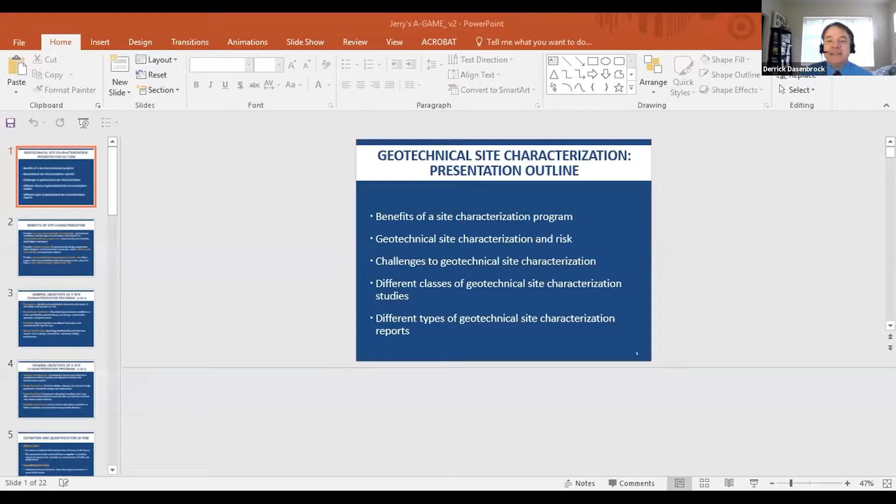Okay, good afternoon, everybody. Thank you, Derrick, for that great introduction that we always write for ourselves and then somebody else presents. So my presentation, I believe Eric's as well, will be about 25 minutes. I have about 20 slides in this particular deck. In slide number 1, the slide numbers are located in the lower right-hand corner of each slide. I'll be addressing the topics for the 5 bullets that you see here. Some I'll spend a little bit more time on than others as we go through these slides.

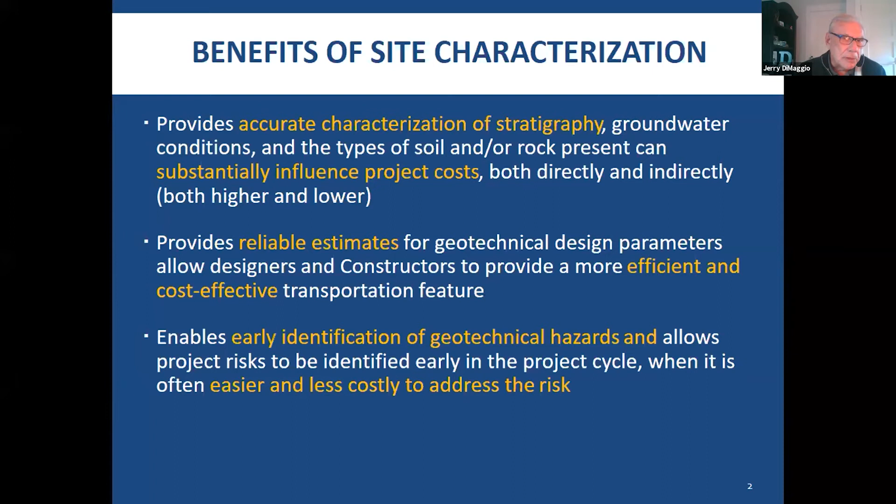And Derrick gave a great introduction in terms of what the objectives and goals are for this particular webinar. So let's begin with the benefits of site characterization, and I'll use my cursor as a pointer as appropriate. Some of these are quite obvious, like the initial one, accurate characterization of the stratigraphy. We do that because it has a tremendous impact on project costs, both directly and indirectly. We're interested in the second bullet, reliable estimates for geotechnical design parameters. And the third bullet speaks to an area that's grown in attention, I'd say in the last 15 years: the focus on geotechnical hazards. A regional type hazard, of course, would be seismic, but we could have local hazards as well as other regional hazards.

Well, let's speak a little bit about the general objectives of a site characterization. This is one of two slides, with some redundancy from the previous slide, but the objectives are very important for any study you undertake, because if you don't have a defined objective, you won't know success when you achieve success. So as we said before, we're interested in stratigraphy, groundwater conditions, and honestly, we don't do as good a job as we could and should relative to the underground groundwater environment many times. We're interested in suitability, and suitability is for the specific objectives and uses of the geotechnical feature that we're interested in evaluating. I already mentioned hazards, how we're going to cope with hazards, what are the design protocols and the construction means and methods associated with that.

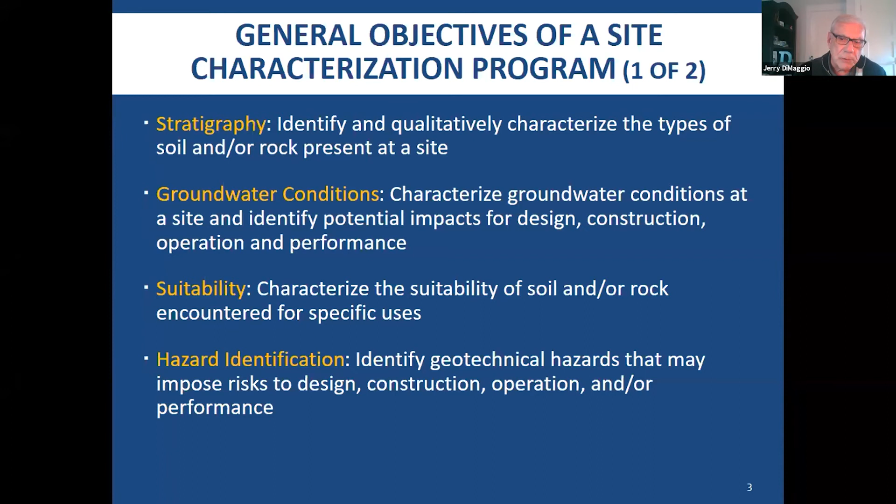Continuing on with that theme of objectives, we're interested in location and alignment and the qualitative characterization of the conditions so that we're better informed in terms of location and alignment decisions for all types of infrastructure projects. We're focused on the highway community because that's kind of where we all live, at least in part. But everything in this webinar series is equally applicable to all types of infrastructure, could be rail, energy projects, wind farms, et cetera.

We're interested in design parameters, and Eric will cover this in a lot of detail, the reliable estimates of the relevant design parameters we're going to be needing for both design and construction. Still today in my practice we often forget about the concept of constructability tied to the design parameter bullet. When we select design parameters, we should be fully cognizant that we're selecting those for two phases of the project, design and construction.

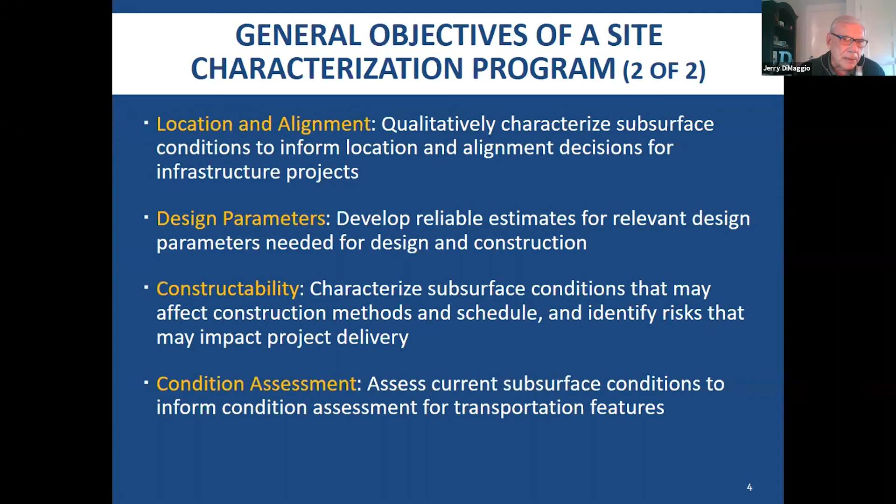We're also interested in the last bullet, looking at the condition assessment of geotechnical features, specifically transportation features. That might be immediately in post-construction. Many of you are aware of the transportation asset management programs underway for more than a decade in the last two highway bills, and there's continued growing interest in geotechnical assets. The new AASHTO code for design and construction of highway tunnels has a design life of 150 years. That sounds wonderful, but what does that mean? How do I develop the protocol for evaluation post-construction between the closure of the project and 150 years? Fortunately, I'm not going to be around, and probably most of you won't either.

Let's talk a little bit about risk. That's a buzzword we hear often. I'll begin with this slide and a subsequent slide providing a little definition. It's a futuristic event, and that's often forgotten, so it may occur, it may not occur. We often think of risk as a negative connotation, but if we look at risk and apply it at a project, program, enterprise, or organizational level, we can also have risks that are positive, and we call those opportunities.

So a little tutorial on the basics of risk management, looking at it at a project level related to cost, schedule, or the maintenance of traffic, the MOT required for a particular initiative. Even on a relatively small project you can encounter lots of risk. I worked with Puerto Rico Highway and Transportation Authority about five years ago on a $2.5 million bridge replacement, and the evaluation of risk assessments, several related to geotechnical, amounted to over 70 risks on that $2.5 million bridge replacement project.

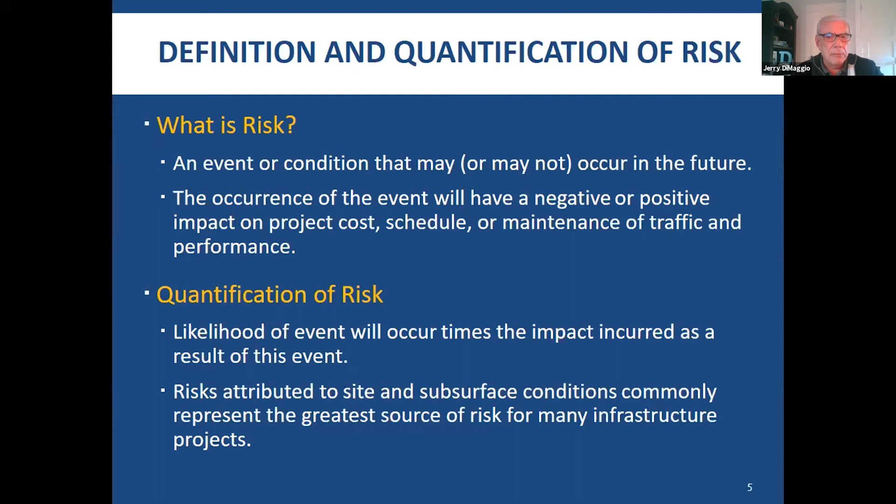Well, you can't address all those things, so there's got to be some protocol for evaluating which risk is more important, both the opportunities and the threats. We do that by a simple product: the likelihood that the risk or event might occur times the impact or consequences if the risk should occur. Unfortunately for us, and maybe fortunately for us, many of the risks attributed on infrastructure projects are directly tied to site and subsurface conditions, and they often result in disputes, claims, arbitration, bench trials, trial by jury - all painful processes for those of you who haven't gone through this.

So a little bit more on risk is, how do we manage these risks? I use the Puerto Rico example of the 70-some-odd risks on a $2.5 million project. Well, the term that's really applied, and continues to struggle to be mainstreamed, I would say, by most of the 52 departments of transportation, is risk management.

Many people have the opinion that when you develop a risk register, you can pound your chest and yell yahoo, and that's terrific, and you're all done. That's really just the start of the program. That takes you through identification and assessment. To really be undertaking a risk management program, you have to develop an action plan, and that action plan may require some resources because it's intended to be a proactive plan.

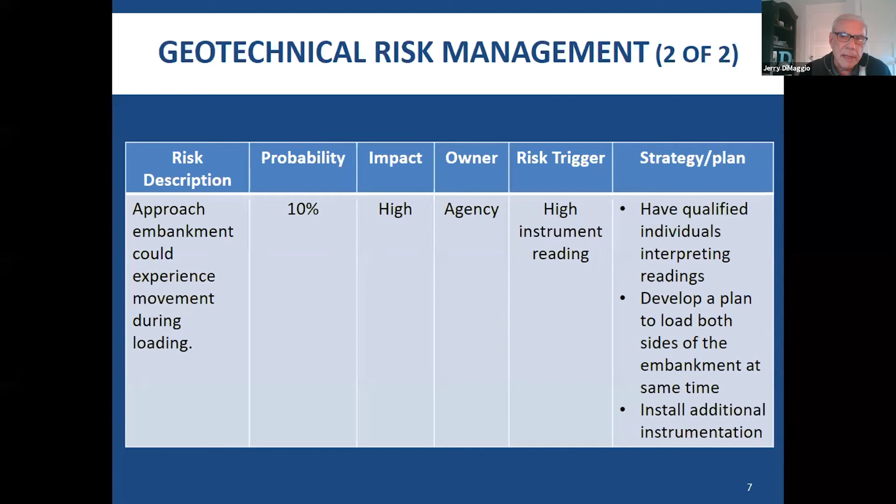That's the risk trigger. And then, as I mentioned before, we've got to have a plan. You can see, without going into it, we've got three possible strategies that we can evaluate based on the probability of success and the impact of taking on those actions - how successful we would be in mitigating the risk or seizing upon the opportunity.

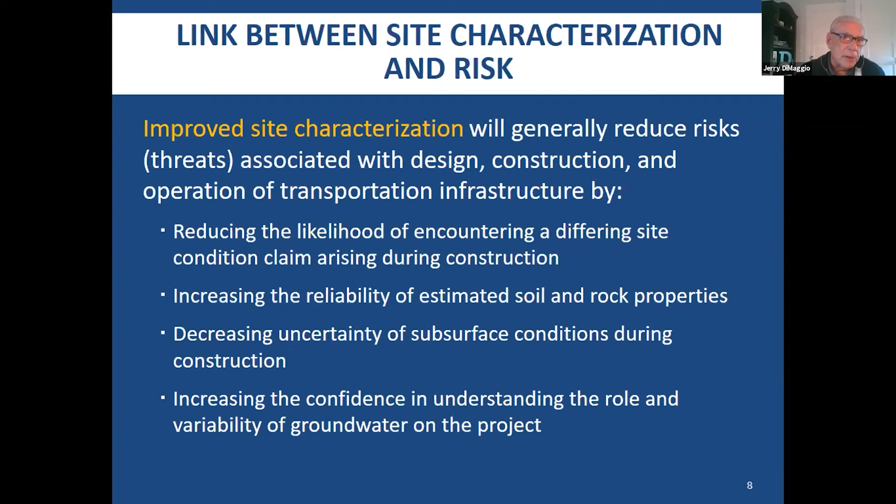Now, P3 projects require some extra thinking on behalf of us involved with site characterization, because the information we gather and its utilization not only affects design and construction, but is related to maintenance and preservation activities that have to occur at least during the period of the franchise. So there's a bit of a value proposition with site characterization.

And if you answer yes to both of those questions, the site characterization scope you've laid out produces value and is justified. Now, what happens next is dependent upon your ability as a good salesperson. Most engineers and scientists are terrible communicators. So if you've got to sell that to a structural engineer, a maintenance engineer, a construction engineer, put on your best tie, make sure you take the mustard stain off, and practice what you're going to sell to people so you can make the value-added proposition that's appropriate.

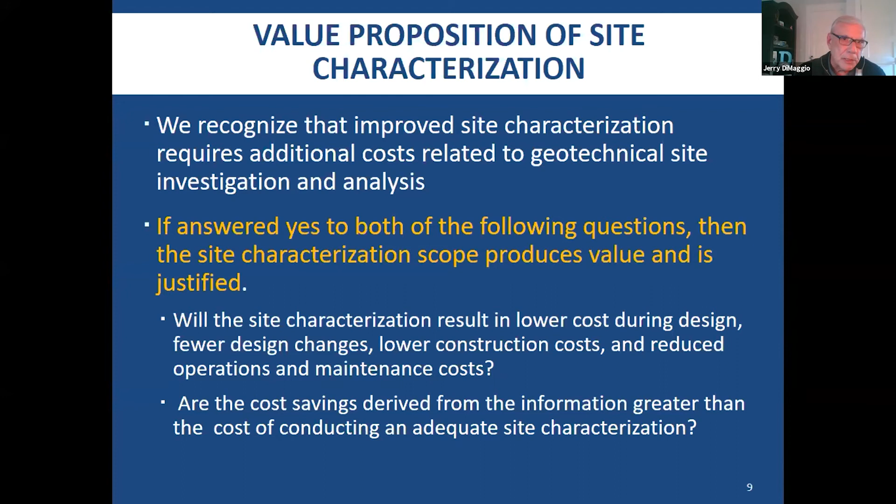As you all know, there always is a gap for a multitude of reasons between state of art and state of practice. Specifically in this case, I'm sharing with you a couple of insights related to site characterization and how wide is that chasm.

Great advances in instrumentation and techniques for geotechnical monitoring and site characterization exist, but they've been slowly adopted into mainstream practice. So if you see one of these tools as we go through this second year of the winter webinar program, we're interested in adopting these things as appropriate into mainstream practice.

As an example, several innovative, great publications on the advances that have been made with the cone. Specifically, citing the reports done more recently related to evaluation of liquefaction potential.

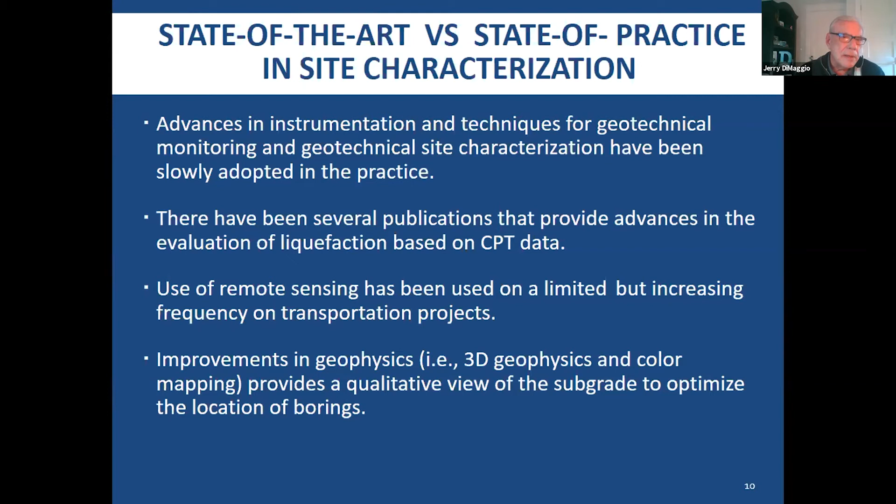Remote sensing, which we're going to hear quite a lot about in this series as Derrick and Ben Rivers will speak to, has been used on a limited basis but with increasing frequency on transportation projects. And improvements in geophysics, which have been with us since I was in undergraduate school 50 years ago, have brought fantastic advances not only in sensor technology but also summarization and interpretation of historical geophysical methods. We've also developed techniques that didn't exist 10, 20, certainly 50 years ago.

Another topic growing in interest is the concept of geotechnical data management. We expend hundreds of thousands, if not millions, of dollars on collection of subsurface information, squashing of samples, interpretation of soil, rock, and geomaterial samples, and then historically we do that on a project basis.

Some of you are familiar with a more specific term called DIGGS. DIGGS is one of the tools that's been under development for a couple of decades now and has come into its own, and you'll be hearing more about that in other presentations.

Let's talk a little bit about trends that help us related to site characterization. Everybody knows what the letters LRFD now stand for. The geotechnical community went there kicking and screaming - first LRFD AASHTO specification written in 1994 - but geotechnical people today have drank the Kool-Aid. One beautiful thing about reliability-based design, specifically LRFD, is that the resistance factor can be directly tied to the quality of subsurface investigation and site characterization.

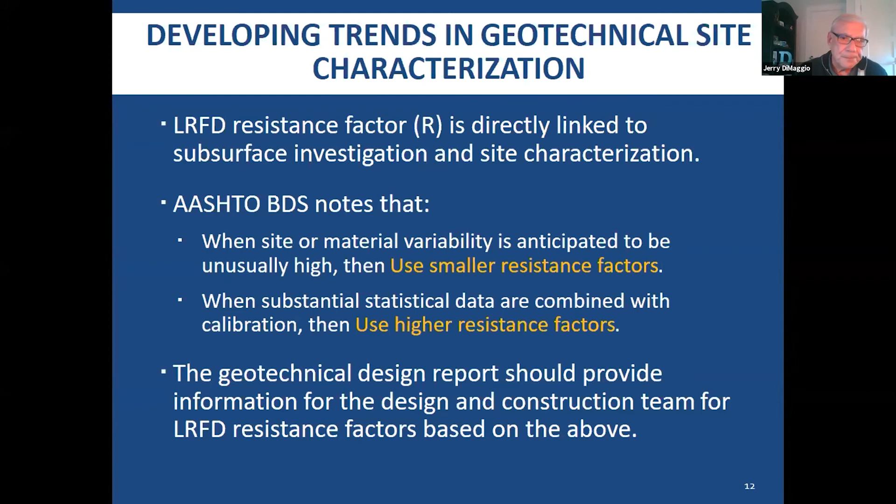What I'd like to share with you is not all of these, but to hit harder on what I mentioned before - the office study. I was corrected by a good friend of mine, initials BR - I wonder who Ben Rivers is - because I had this titled about a year ago as desk studies, which is the traditional term. Ben advised me that a lot of offices don't have desks any longer, so it was more appropriate to use the term office studies. So I too have drank the Kool-Aid. But back to the task here.

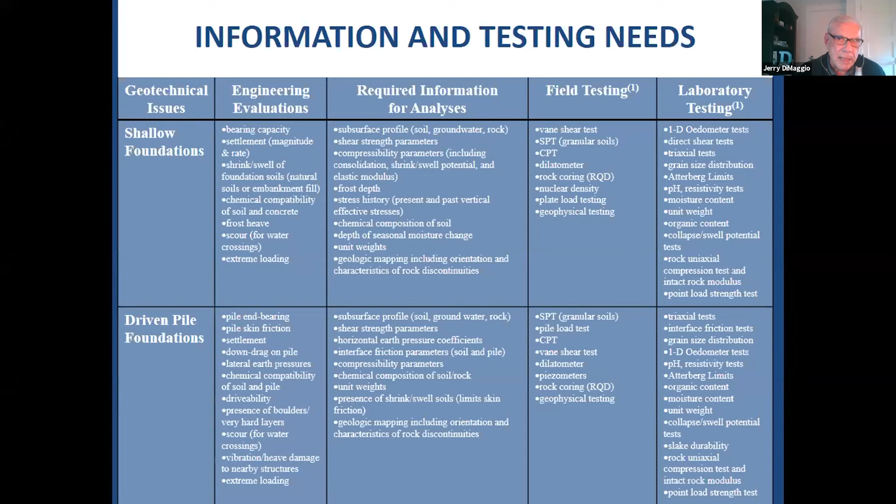So sticking with the driven pile example, you could see those listed - what type of field testing might be required in order to provide the information you need to execute your analysis. And you see those listed, no surprises there as well. Finally, at the extreme right column, you see what types of laboratory tests might be appropriate. Of course, the field testing and laboratory testing are complementary to each other.

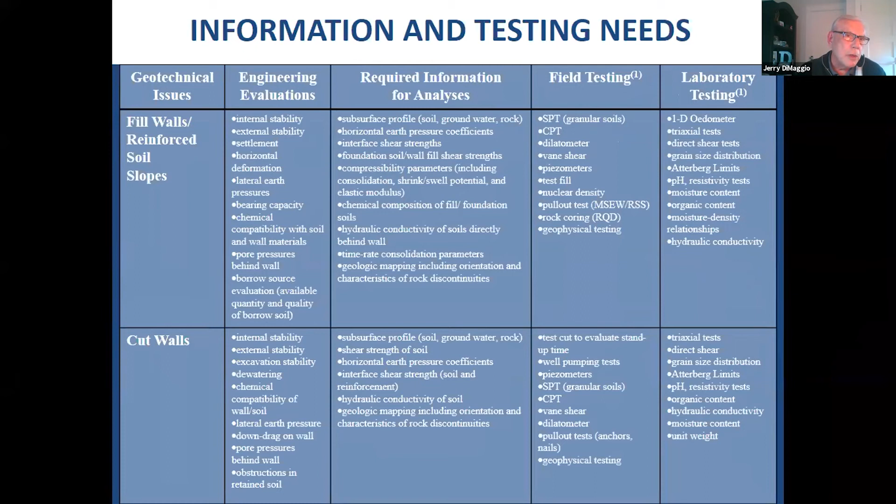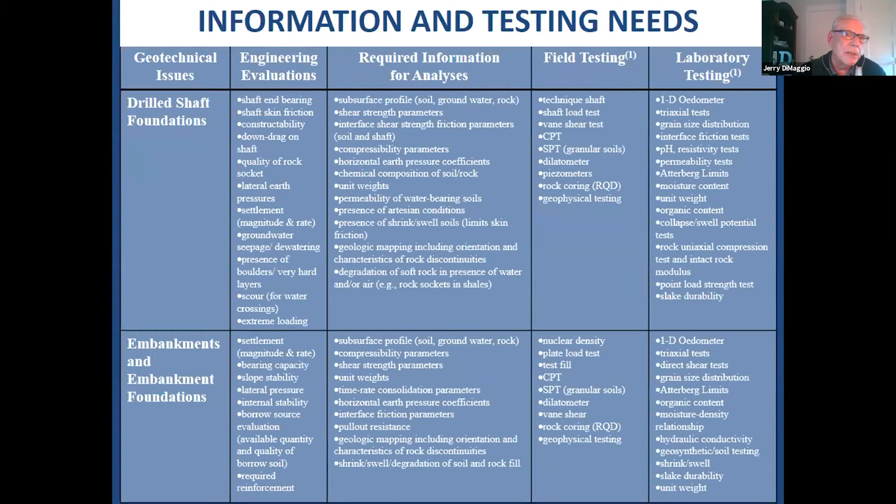Now, two other slides of this type exist. I'm not going to go through these as I did using the driven pile example, but you see the types of geotechnical features addressed: fill walls, reinforced soil slopes, cut walls. And a final slide of this type: drilled shaft foundations, or drilled foundations generically, and embankments and embankment foundations.

Now, one thing I haven't mentioned that I think is quite important - and I'm biased because I was one of the co-authors of GEC 14, which is about quality, or assuring quality, in geotechnical reporting documents. We have a number of reports, as the geotechnical specialists on the webinar today know about: field investigation logs, geotechnical data reports, geotechnical design reports, and geotechnical baseline reports.

So this document, if you're not familiar with it, I would strongly encourage you to obtain it and review it. It's focused solely on the design type reports, not geotechnical reports or the documentation recorded during the construction phase of the project. So you're zealous, you've collected all this information, evaluated it all, you've written one or more of these type reports. What do you do with it?

Final slide of my presentation. A topic that comes up quite often is how do we deal with investigations for projects using alternative contracting methods?

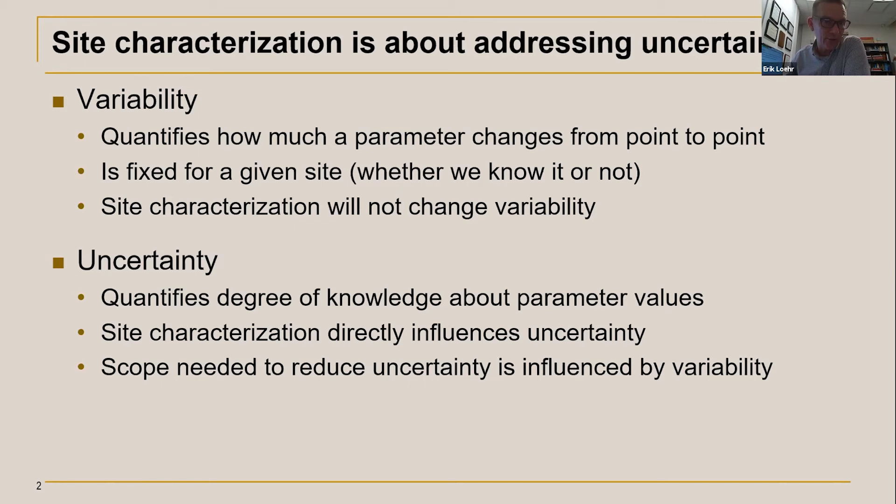These two terms are not completely unrelated. How we reduce uncertainty certainly depends on the variability of a given site. The last bullet we could probably debate, but it's my philosophy that in most cases, variability is best addressed through judicious design. So if we have a really variable site, really variable stratigraphy, we ought to be thinking about designing things that can accommodate that variable stratigraphy. Maybe that includes foundation systems that can be lengthened or shortened, or specific construction phase evaluations or other kinds of things.

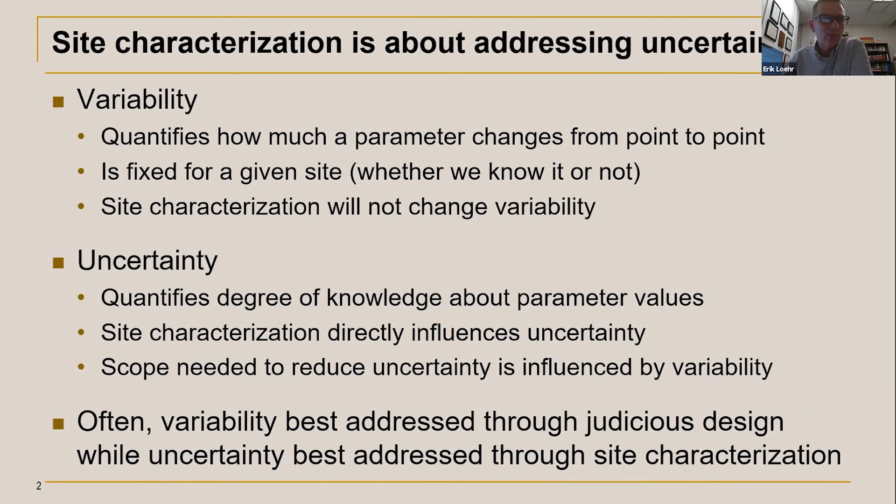Variability is what it is, and so it's oftentimes best addressed through design and construction. Uncertainty is what we're after through site characterization, and when we do more investigation, we can generally reduce that uncertainty, and we'll try to put a quantity on that as we go through.

So I'll start here with current site characterization requirements, and like Jerry, I'm focused on the transportation community here, but it really goes beyond that, and the same kinds of things apply to other jurisdictions as well. Most of our site characterization practices—Jerry's summarized some of the AASHTO things—have prescribed minimum requirements: a certain number of borings, certain spacing of borings, a boring every 200 feet, a boring every 500 feet, sampling every 5 feet, and other kinds of things.

So we have some minimum requirements that we're required to do by AASHTO provisions. But there's an important caveat: based on the judgment of the designer or the site characterization specialist, additional investigation should be performed when it's appropriate and needed. And that's where things honestly get a little fuzzy. It's not hard to convince somebody to do the minimum investigation required by the AASHTO specifications. Where it becomes more difficult is when one has to do additional investigation.

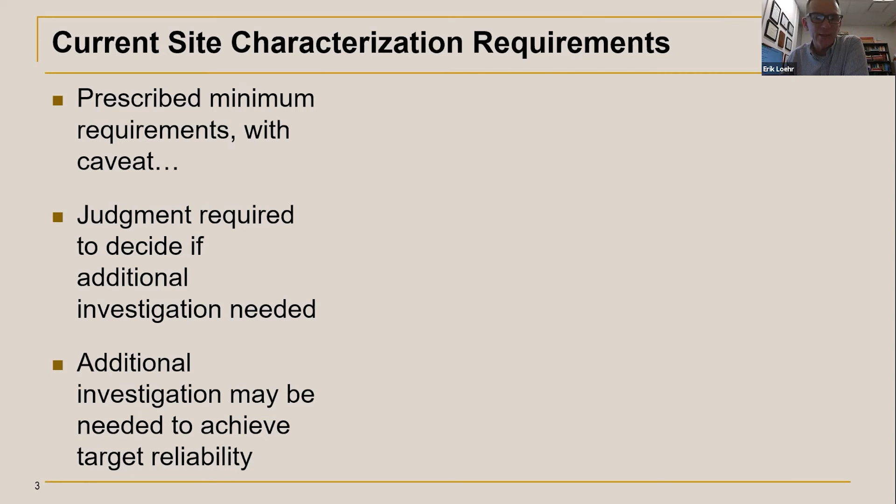Unfortunately—maybe it's not unfortunately—that investigation in the current state of the AASHTO specifications really dictates whether or not we're going to achieve the reliability that we're targeting when we do design with the AASHTO specification. I'll illustrate that with results from a paper that Dan Ding, Bill Likos, and I wrote about 5 years ago looking at this. Essentially what we were doing in this paper is simulating design and looking at how site characterization influences the reliability of designs. We did this through simulations, which you can argue with, I guess, but I think they're relatively straightforward.

Essentially what we did is we took sites with different characteristics, and did simulated site investigations, randomly sampling measurements from a site. We would take those measurements, develop a design, and then evaluate how reliable that design was based on what we really know about the site, about the true site condition. We would do this repeatedly, and we'd end up with a collection of designs based on different site investigations, looking at how reliable those designs were.

We chose to categorize the reliability into three categories: a red category, a green category, and a yellow category, as you'll see in the graphs. Green was a satisfactory design, reflecting a design that practically achieved the target reliability—it was as reliable as we wanted it to be. That's obviously the most desirable result. The yellow symbols represent over-reliable designs—those that are more reliable than we're really targeting from the design specifications.

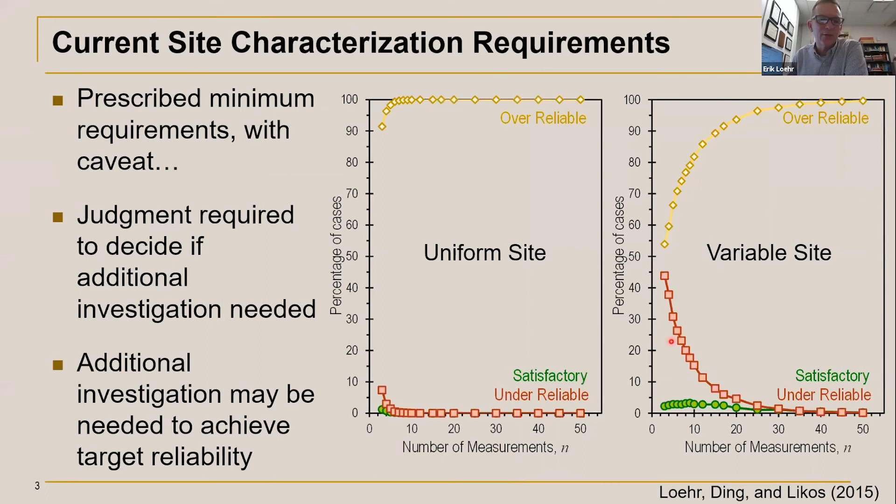So obviously that's not a desirable thing when we have highly variable sites. We would like for all of our designs to achieve the target reliability, obviously. The content in the latest version of GEC 5, the guidance provided there, was really intended to essentially try to reduce that red curve on the previous slide, to produce this where we end up with fewer under-reliable cases. We did that by including a considerable amount of information about probability and reliability, maybe to the consternation of some, but we did that so that we could reduce the likelihood of having that under-reliable case.

Simply put, the guidance provided there is that all important design parameters, and we can debate what's important, but I think most people have a pretty good perspective on what that is. We need to establish those to have uncertainty, a coefficient of variation of the model. Really, that's what I'll refer to as uncertainty here, less than 0.3. So this really puts a quantity on uncertainty and really a limit on that uncertainty, and that's intended to reduce that red curve on the previous graph. While we would love to have that all the time, we certainly also appreciated that one may not always get that.

So we just added the guidance that said, okay, if you can't establish the model uncertainty to be less than 0.3, if it's greater than 0.3, then rather than selecting the mean value, which is what AASHTO recommends for an adequate site investigation, you ought to select a conservative estimate for the design parameter. And in that way, in those situations, we can also reduce that red curve and reduce the potential for having an under-reliable case.

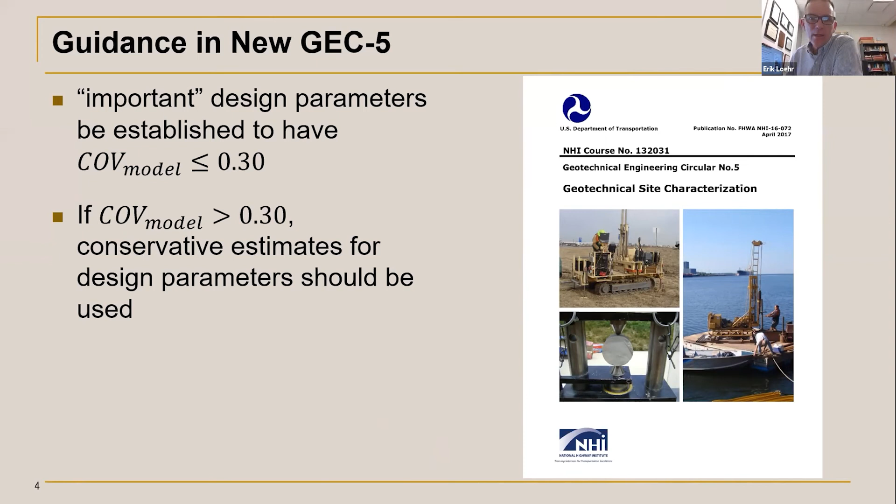Okay, so how does this new guidance look, and I think the guidance will change a little bit going forward and get even better. So I've drawn here, and in fact this is not a transportation project, but certainly it could be.

A stratigraphy, a profile of different materials at a specific site. A series of borings were conducted to establish that stratigraphy. Establishing stratigraphy here obviously involves some subjectivity. If we've got, I don't know, 100+ folks on the call here today, if every one of us looked at the same data, we would probably come up with a little bit different stratigraphy. But my guess is it probably wouldn't be too different for most parts.

The objective of site characterization, and really the guidance that's provided in GEC 5, is rather than trying to say the strength at a specific point is this value, what we want to try to do is to establish and characterize this mass of material that forms one of these material layers.

And so AASHTO in the specifications defines a site, and the site is really an area over which conditions are relatively uniform. So rather than focusing on point-specific values, I think it's useful to consider what we do - the boring, sampling, testing, whether that's field tests or laboratory tests, whatever it might be. When we run a test, it is really just a statistical sample from this mass of material that we're looking at, and we need to try to characterize each of the different masses that we've got.

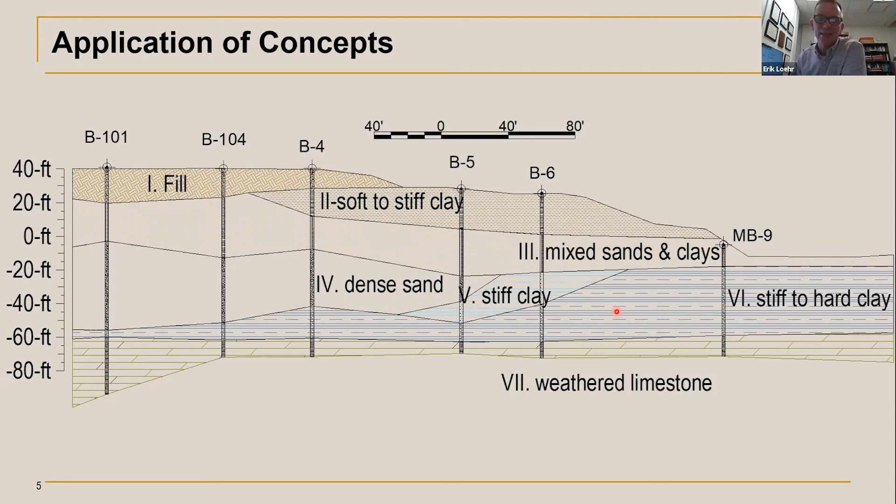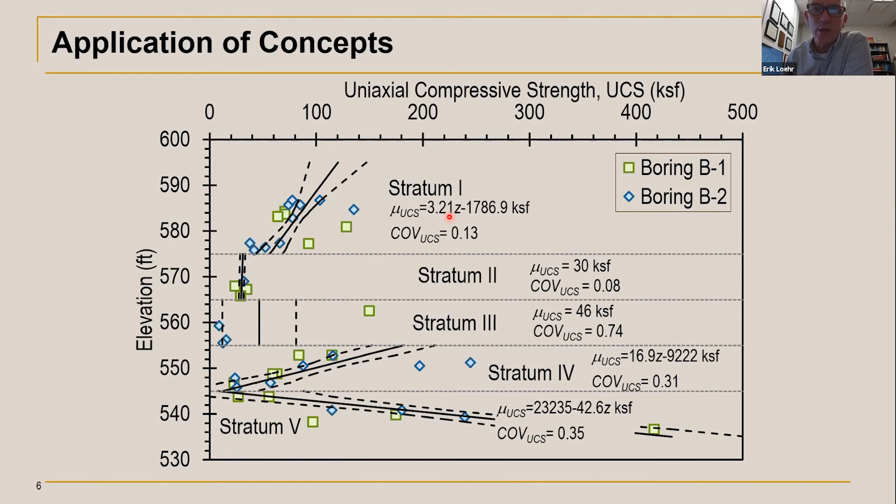So moving on here, kind of stepping back about how we do this. So what do we do? What is it? How do we quantify this uncertainty? I'm going to go through just a couple of simple examples here.

If we do these simulations where we simulate different site investigations and look at what that tells us, it's important to remember that the population is the population. The site is the site. That is the variability. Site investigation is not going to do anything about that. What changes when we do different site investigations is how much we know about that. It changes the uncertainty. It's sort of a shift in perspective.

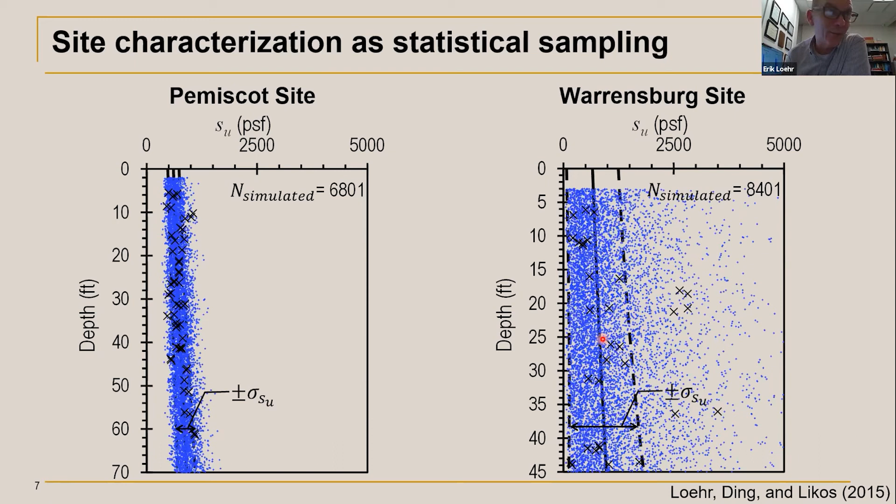Rather than trying to go out and push a tube at a specific location to get the strength at that location, we're now going to think of pushing the tube as really just taking a statistical sample of this population and trying to infer what we can about the population from that sample. It's important to recognize that when we go out and sample, we don't get to pick which of these test results we get. We do get to pick the location, but not whether we're getting a low value, a high value, or a nice middle value. We just get what we get. And that results in us having imperfect information about the site, and that's obviously the challenge of site investigation.

So I'm going to look at three different parameters. The first one here is the mean. Then we'll look at the variability, which again is fixed, but what we know about the variability, or our estimate of it, does change. And then the final one I'll look at is the uncertainty.

So if we take these two sites, the left one is the nice one, the right one is the complicated one, and we repeatedly do this simulated site investigation and calculate the mean value, what do we get? We find on the left that when we do relatively small numbers of measurements, we can actually get mean values that go over a relatively high range. Our actual mean of that population is on the order of 600 or 700 PSF here. If we just take 3 samples, we could get a mean that ranged somewhere from about 350 to something over 1200 PSF, far different than the actual mean. In most cases, we'll get a mean that's pretty close to the middle.

The green symbols here represent the mean of the means. As you do these simulations repeatedly, what you find is that for low numbers of measurements there's pretty great uncertainty in what that mean value is. As I do more and more measurements, I get less and less variability in those means, and therefore less and less uncertainty about the mean.

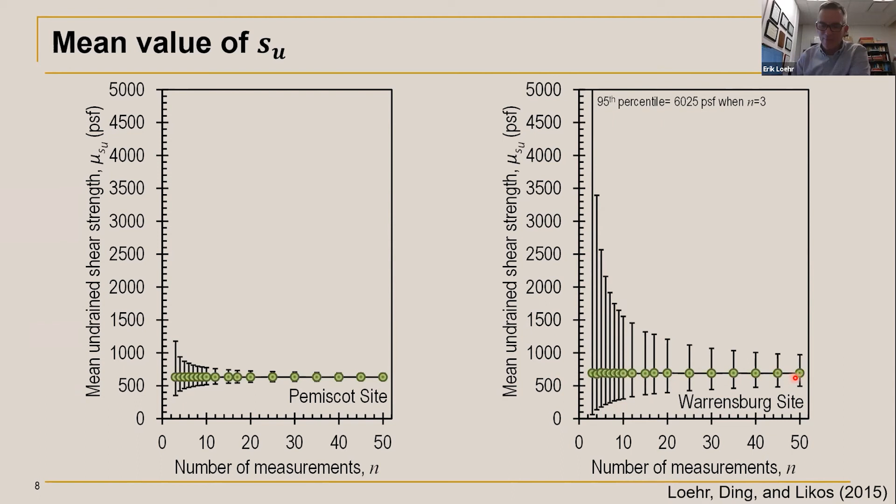As I do more and more tests, two things happen. The primary thing is the range of means that I might calculate from my statistical sample reduces dramatically. The mean itself, the average of those means, actually stays pretty constant.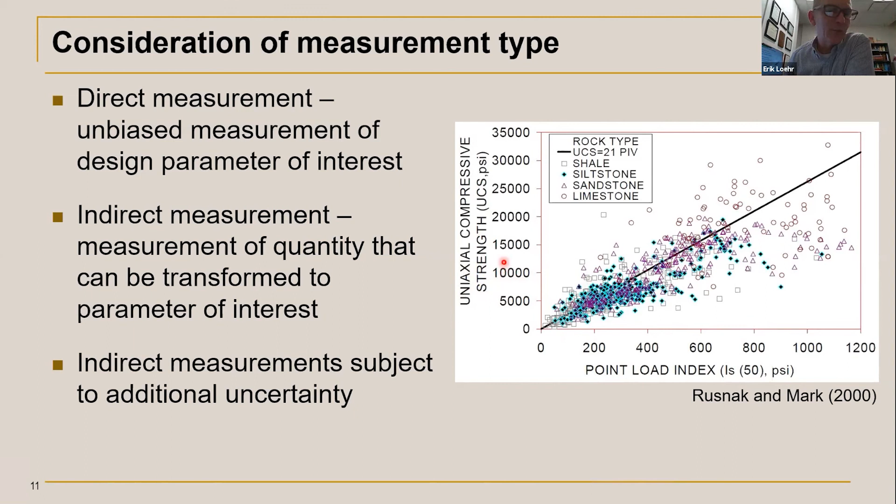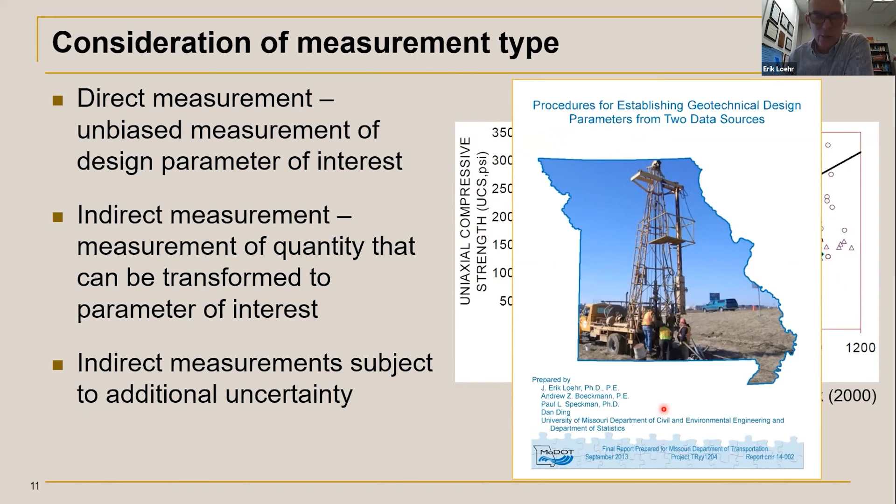That gives a much more reliable transformation and allows us to more reliably establish the design parameter of interest, which in this example is uniaxial strength. That involves some math, and we did work for the Missouri Department of Transportation a number of years ago that lets you combine two different sources of data to establish one single strength parameter.

Almost done. This is another example: influence of measurement type. We all know this fundamentally, but we did a study funded by Missouri DOT looking at different sampling and testing methods and their quality. Different sampling and testing methods produce different levels of variability and uncertainty. We looked at undrained strength from relatively high quality boring sampling and testing to things nobody likes, like the pocket penetrometer or the Tor vane device. As expected, higher quality boring sampling and testing gives more reliable estimates for strength parameters, and we can take advantage of that.

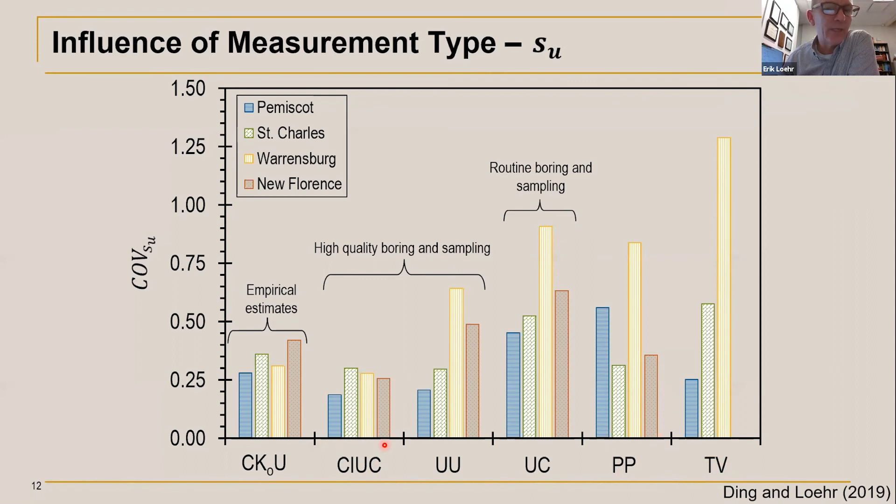Last slide here, really the future, and I put question marks here because I think the future remains to be written. As I've described in this presentation, the big benefit of considering things probabilistically is getting feedback on our site characterization that allows us to get smarter as we go along. Jerry mentioned the issue of selling, and I wholeheartedly agree that we sometimes don't do a very good job of selling the value of our site characterization.

Well, one of the things that I think can help us, and this is really maybe for the future, is having resistance factors that depend on site characterization. It's actually implemented at present by the Missouri Department of Transportation for about the last 10 years. The beauty of having resistance factors that depend on site characterization, and depending on the reliability of the parameters, is it establishes a quantifiable and apparent value for site characterization.

So you can start to make good value decisions about when more site characterization is appropriate and when it's not. The final thing is it shifts the perspective. Our current perspective is we need to do more site investigation in order to achieve the target reliability, which is certainly true, and I think that's our current situation. If we can develop these right, we can shift that responsibility from trying to achieve the target reliability to really trying to optimize the value proposition that Jerry mentioned. And that will improve our practice considerably.

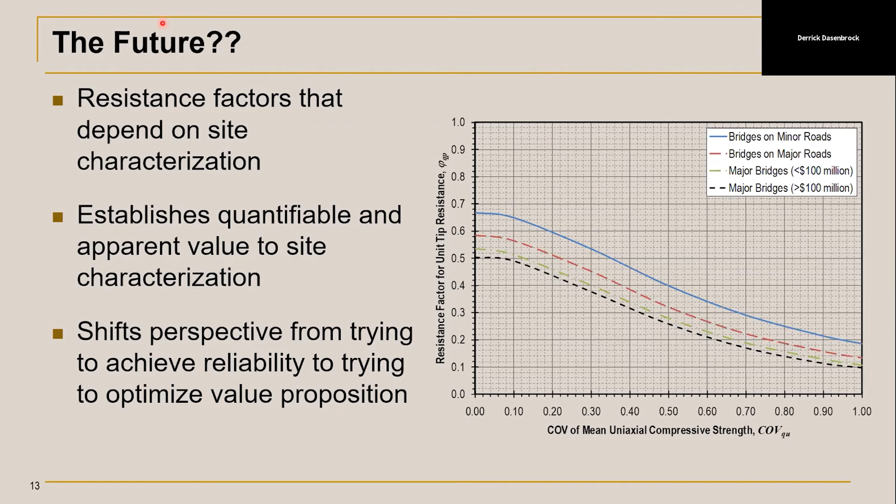Derrick. Okay, thanks, Erik. At this point, I'd like to invite our panelists to turn their cameras on and join us for the second half of today's webinar. We have a number of questions that we're going to be posing to our group. We've got representatives from North Carolina, New Hampshire, California, Washington, and Minnesota DOTs joining us this afternoon.

I think that Jerry and Erik did a really good job of setting the stage to talk about what we're looking at in terms of site investigations, what our goals should be. And I thought it was very interesting, the idea of distinguishing the ideas of uncertainty and variability as being sort of in two different bins.

So maybe as the first question to our team, how do you currently judge how much to do on a project, and when the established minimums in the LRFD and other codes are good enough, and maybe when you feel it's a good idea or even a critical idea to change the scope of work and do more on a project? Maybe we'll start off on the East Coast and work our way west. Any thoughts from New Hampshire or North Carolina to start us out?

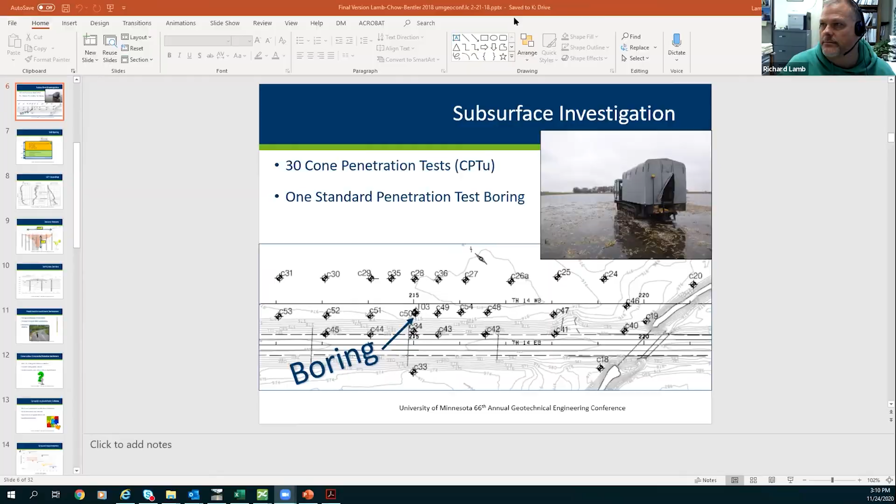Cool, I appreciate you sharing that with us. So, Derrick, go ahead.

I'm sorry, I was just going to say I'm a strong advocate of cone penetration test technology, if anybody hasn't guessed that yet. We've used cone quite a bit in past years, but we're using it more now for dissipation tests and things like that in our coastal areas - definitely quicker response, easier and quicker to design for long-term settlement, versus collecting tubes, bringing to a lab, and all with our standard rigs. The other thing I'll say is in North Carolina, we're fortunate our designers and investigation groups are all pretty much housed in the same office across the state, so you have connection with different geology across the state with the designers for the foundations. One of the big dollar items we've managed to do from time to time are load tests, and we've had some pretty big bang for the buck. Although it did take a lot of conversation to get folks in upper management to understand that a few thousand or tens of thousands of dollars for a load test can save more than $1 million on a bridge and things like that.